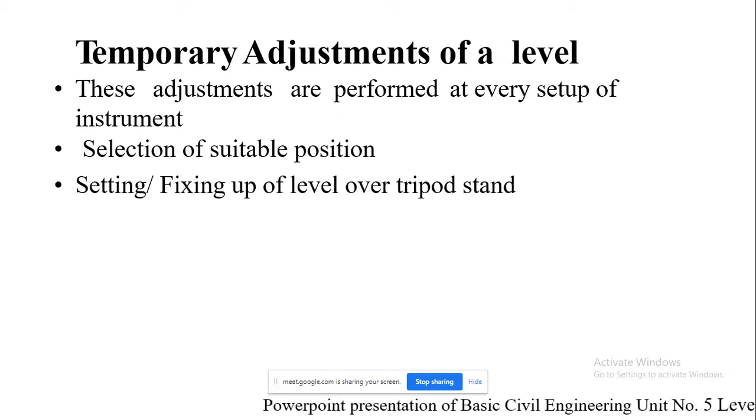First of all, you are supposed to select a suitable position from where the maximum points can be covered, that is, the staff readings can be visible. At such a place you are supposed to keep the level. Second, setting or fixing up of level over the tripod stand with the help of wing nut.

Next one is the approximate leveling by legs of tripod stand. Next one is perfect leveling by foot screws, focusing of the eyepiece, then focusing of the object glass, and taking the staff readings. Okay, so we'll see one by one.

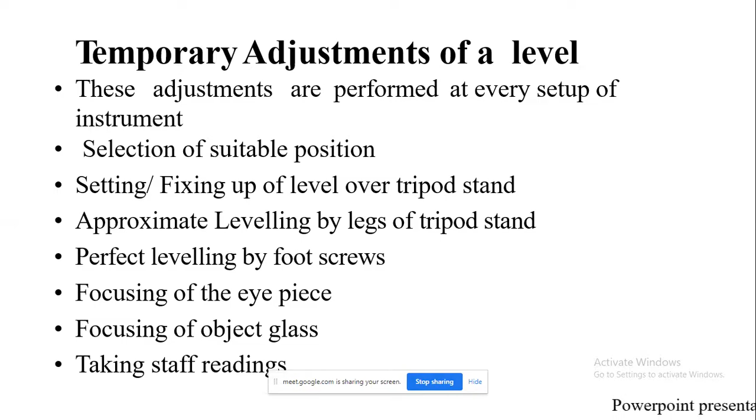So basically, first of all, these are the points. Suppose they are marked here on the ground, of which I am supposed to take the RLs. This I am taking as the reference, a benchmark. Then here is my first point at the corner. Then on the first step of the garden, here is the second point, which is at somewhat higher elevation as compared to that point.

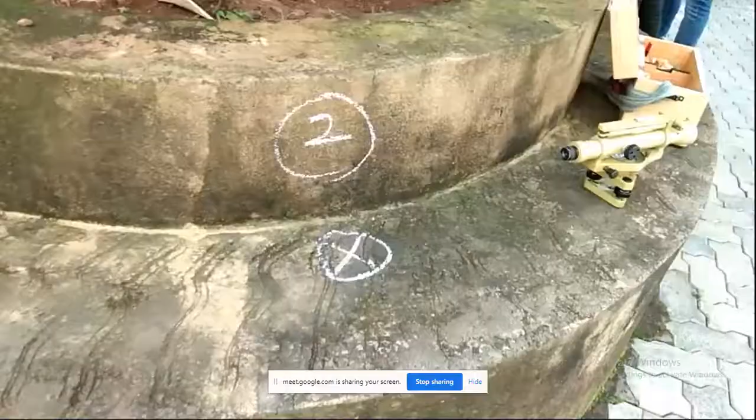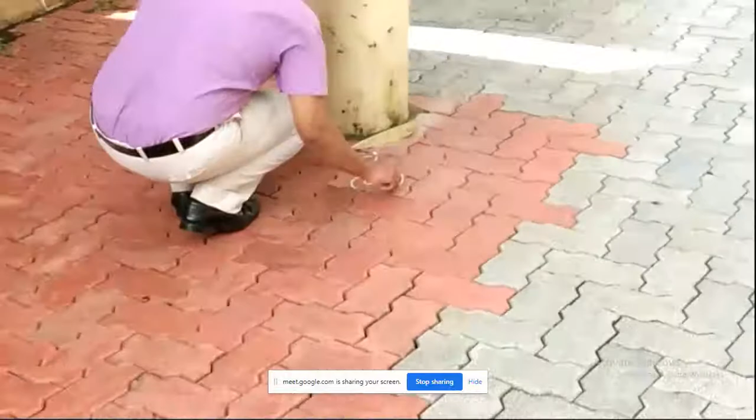Then here is the third point. Then the fourth point is near the strength of materials or testing material laboratory. Fifth point is just beyond the wall. Sixth point is the circular pole. And seventh point is at the first step. So suppose I am interested in knowing the RLs of these points of the ground.

So what is the first step? Correspondingly, I am going to select a suitable position from where all these 7 points are visible. That is selection of position where I am going to keep my instrument.

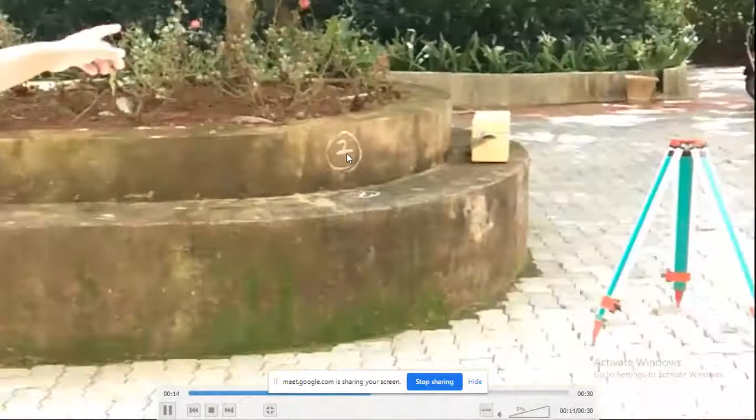So here you can see, there is my first point, that is the benchmark. This is the first point at the corner. Second point I have marked here. Third point is on the right hand side here, corner. Then fourth point is here. Fifth point is on the back side of this column, and sixth and seventh are just behind that. So first of all, I'm going to select the position where I'm going to keep my level instrument.

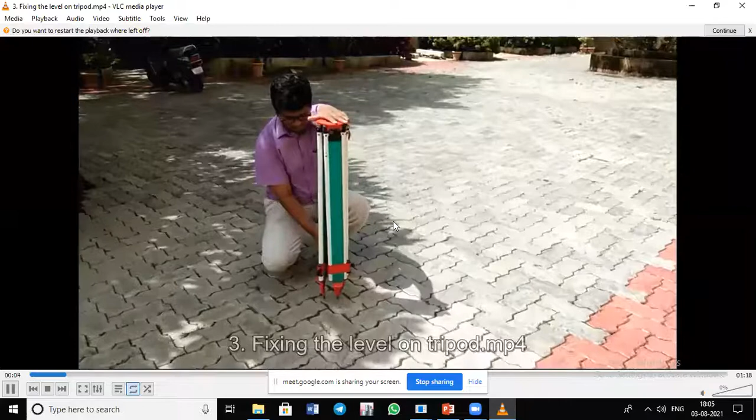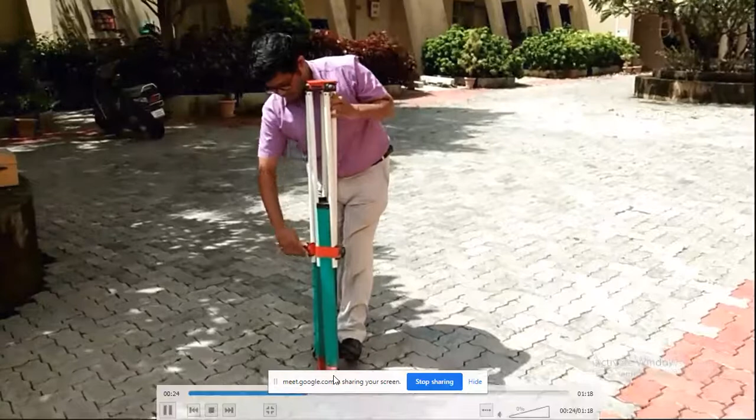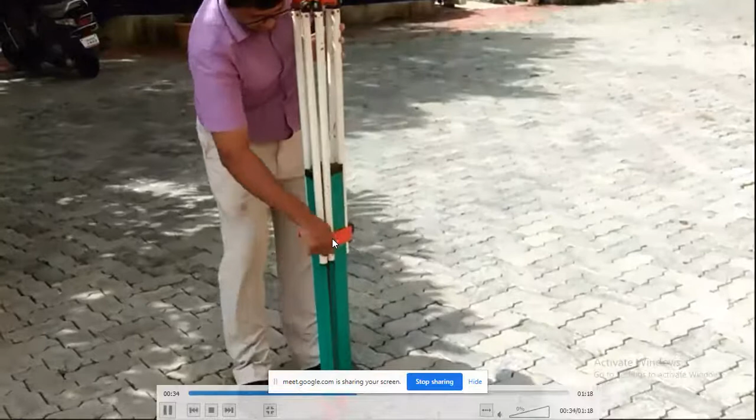Next is setting or fixing up the level over the tripod stand. First of all, I'm going to open the screws, and by keeping the legs at the iron shoes, I'm going to open them equally on all sides. You can see how you are supposed to open it. On a fairly level ground, I'm going to keep all the toes of the tripod stand, and at a suitable height I'm going to adjust it and tighten all the screws, to make it firm.

Then I'm going to spread them well apart. So basically the three legs should be kept in such a manner that they are firm in the ground.

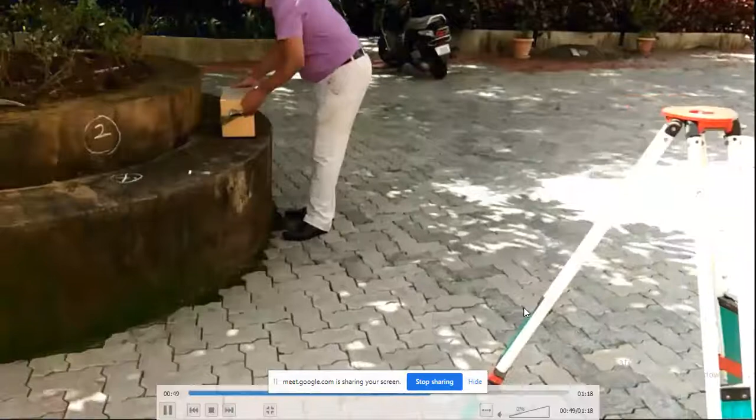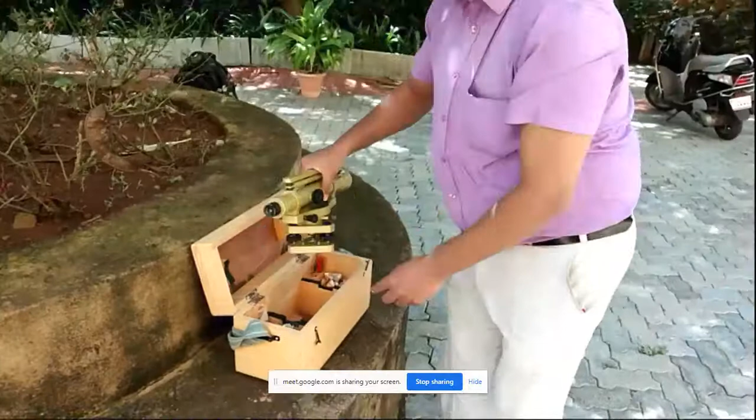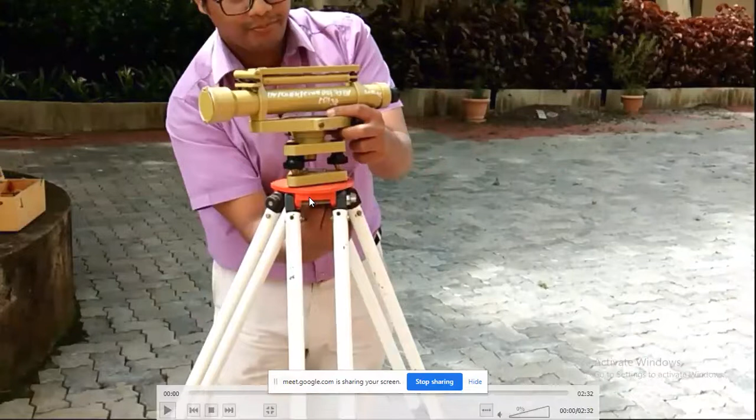So now after selection of the suitable position, I take the instrument, and with the help of the wing nut which is below, I'm going to fix the instrument over the tripod stand and make sure it doesn't move. The wing nut is just below it, so with its help I'm going to tighten it. That is the bottom part, which we call the leveling head.

Trivet. Okay, so after fixing, I have selected the position from which I am going to take the maximum number of points. The next is approximate leveling by legs of tripod stand.

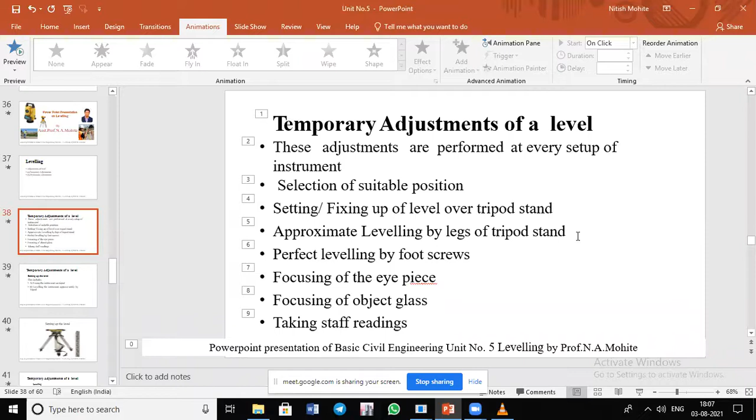Approximate leveling of the tripod stand. So now, here you can see.

After fixing the instrument, these are the components. I'll revise: this is the trivet, these are the foot screws, this is the tribrach. This entire part makes up the leveling head. This is the eyepiece, this is the focusing screw, and this is the object glass.

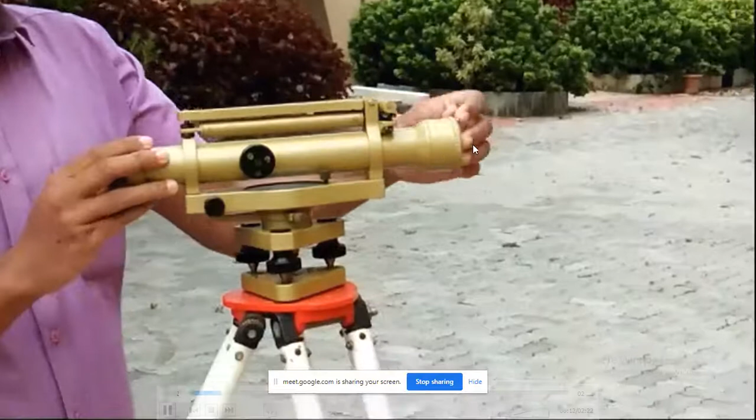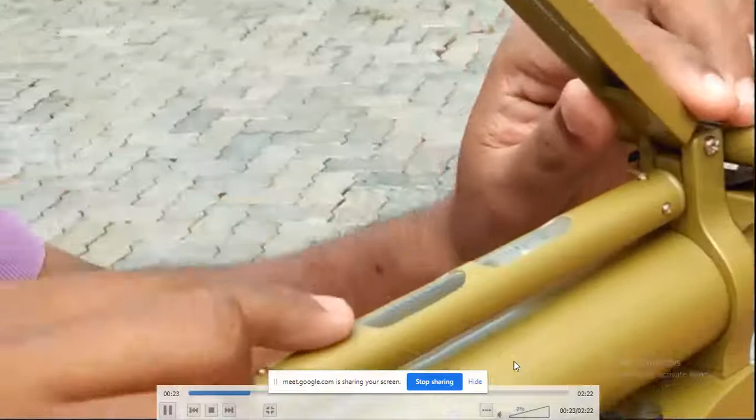This is the longitudinal bubble tube, used for leveling purpose, and this focusing is for clearing the object. This is the bubble tube, which is just above the telescope.

Now, first of all, I will check whether all the foot screws are at the center of its run or not. So when they are at equal height, then what I'm going to do?

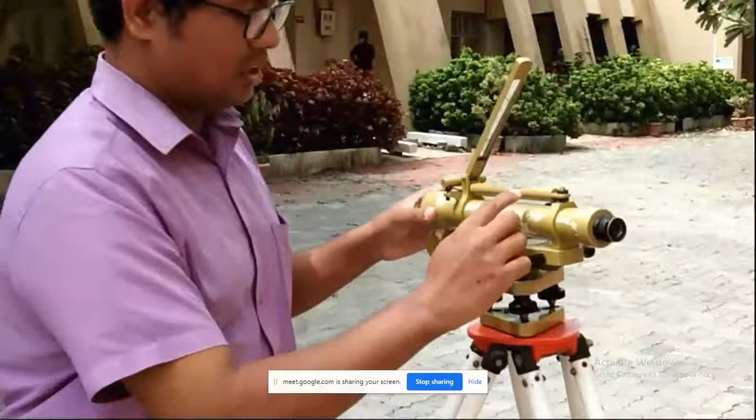Correspondingly, first of all, with the help of the tripod stand, I'm going to bring the bubble by moving the third leg inside outside, keeping the two legs firm on the ground and moving the third leg clockwise or anti-clockwise, inside outside, to bring the bubble at the center of its run approximately.

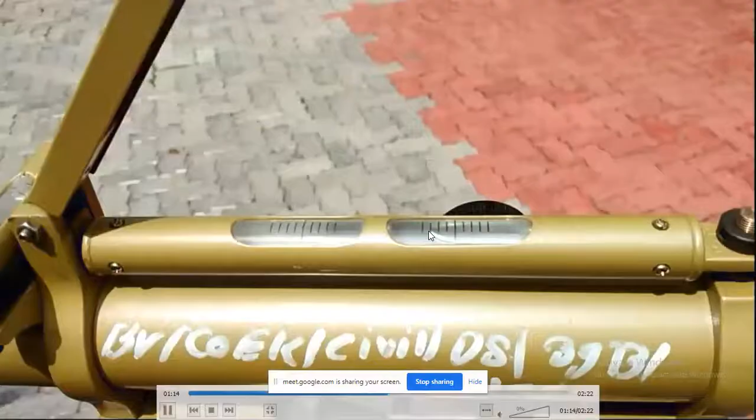So when it comes approximately at the center, you can see there is movement of the bubble as I'm moving the leg. When it comes approximately at the center, I'm going to stop the movement of the tripod leg.

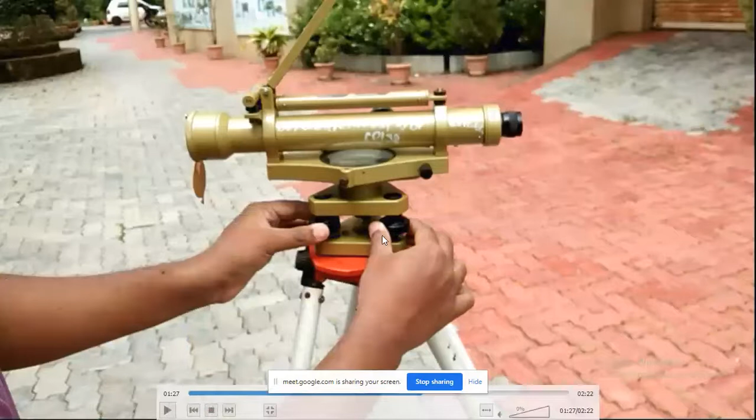After doing the adjustment through the said tripod stand, I am going to do the perfect leveling.

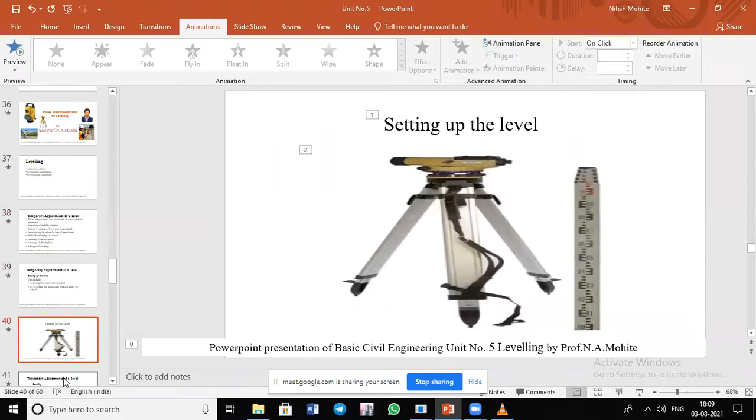Leveling means correspondingly here, as I told you. First of all, I'm going to do the leveling operation with the help of the tripod stand. Leveling is done further with the help of the foot screws.

The purpose of leveling is to make the vertical axis truly vertical. It is done with the help of foot screws.

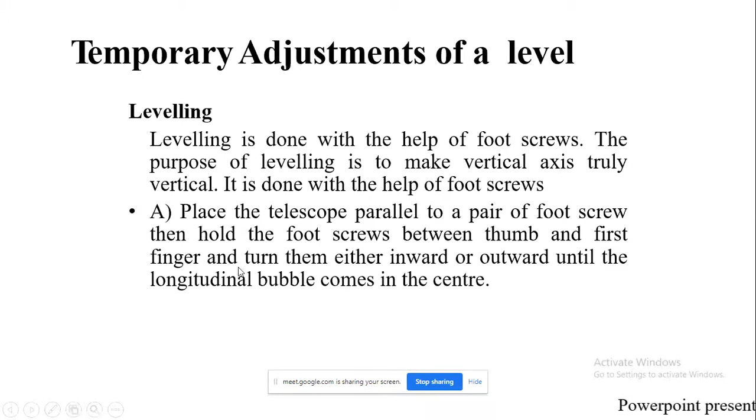First, I'm going to place the telescope parallel to the pair of foot screws. Then hold the foot screws between the thumb and first finger and turn them either inward or outward, clockwise or anti-clockwise, until the longitudinal bubble comes to the center.

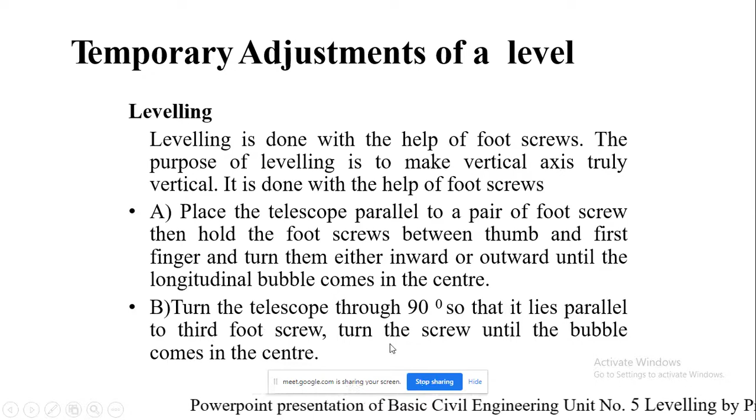Then by turning the telescope through 90 degrees so that it lies parallel to the third foot screw, turn the screw until the bubble comes to the center.

First of all, I will show you the sketch. Here is the longitudinal bubble tube. Likewise, it is going to move.

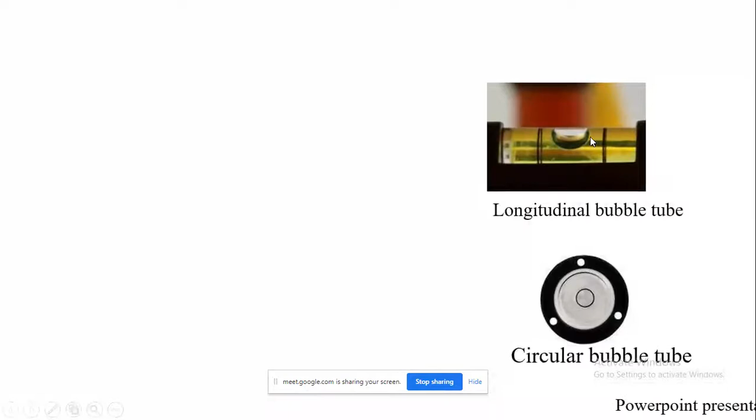This is dealing with the case when you are going to deal with the dumpy level or the theodolite. The circular bubble tube is present in case of auto level or total station.

Move these two foot screws, A and B, simultaneously in clockwise or anti-clockwise direction, and bring the bubble to the center perfectly.

Now what I'm going to do, correspondingly, I'm going to turn it 90 degrees so it will just make it perpendicular. Like this it will be my...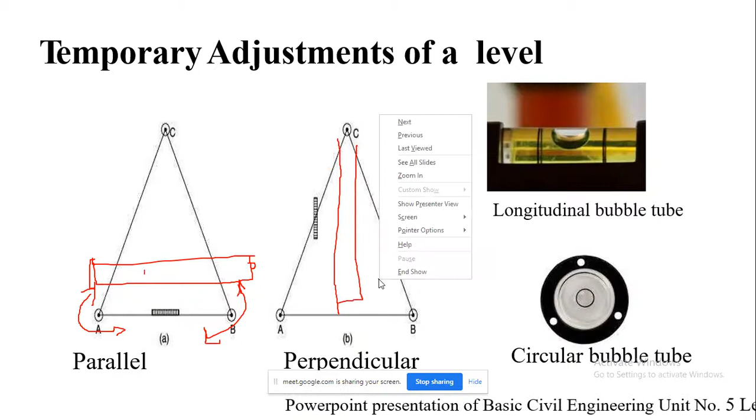Just a minute. Yes, okay, so I'm going to turn it. Like this, here will be my eyepiece, this will be my object glass.

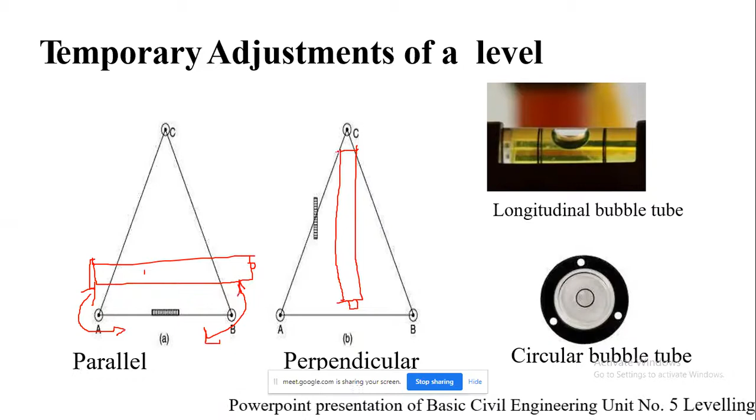Further, make use of the remaining third foot screw and rotate in clockwise or anti-clockwise direction until the bubble comes at the center of its run. Exactly. So how is that? I will show you it.

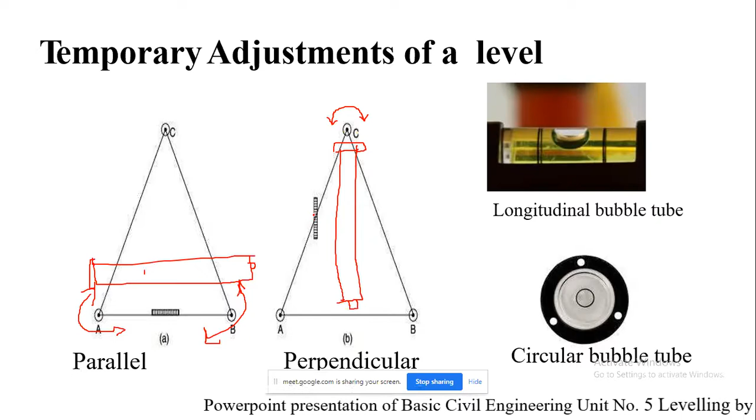Here you can see, I keep the bubble tube correspondingly parallel to the two foot screws and move the two foot screws simultaneously in clockwise or anti-clockwise direction.

So after, as I told you, the tripod's adjustment, here you can see.

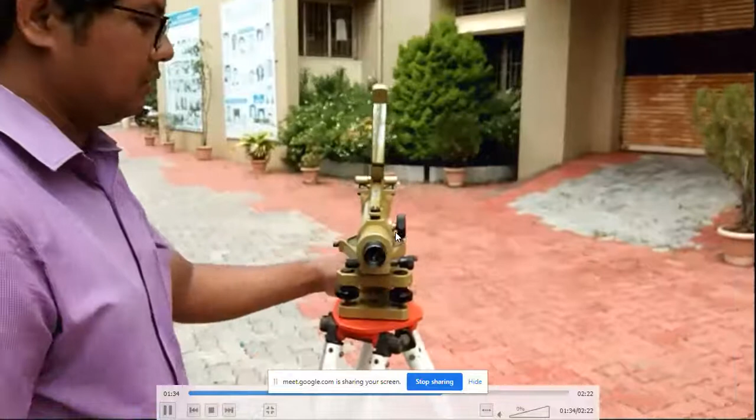By keeping the telescope plate bubble, that is the longitudinal bubble, parallel to the foot screws, I am going to move two foot screws inside and outside, that is clockwise and anti-clockwise, to bring the bubble at the center. Then make it perpendicular to the first two foot screws and rotate the remaining third foot screw to bring the bubble at the center of its run.

You are going to carry out this procedure until the bubble comes exactly at the center of its run. After this, give a jerk and check at any position other than the parallel and perpendicular positions that the bubble remains at the center.

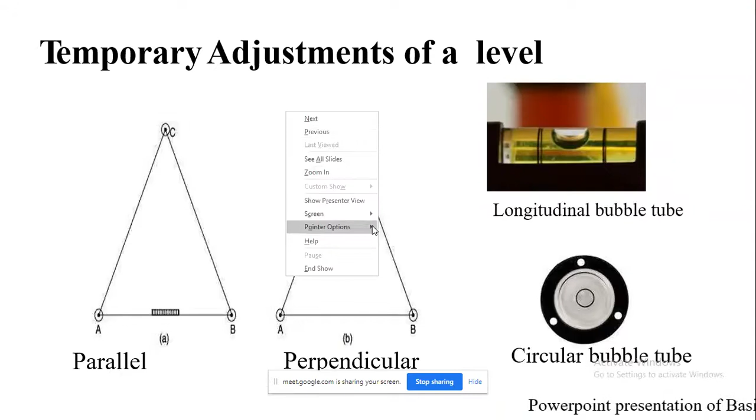So it should not be the case that whenever the telescope is other than in the parallel and perpendicular position, the bubble moves away from center. The telescope might be in this direction or in this direction also, but in each of these cases, the bubble should remain at the center.

So first keep parallel to the two foot screws, then rotate the first two foot screws and bring the bubble exactly at the center of its run. Then keep the bubble tube perpendicular to the two foot screws, rotate the remaining third foot screw, and bring the bubble at the center of its run. In this case, listen carefully.

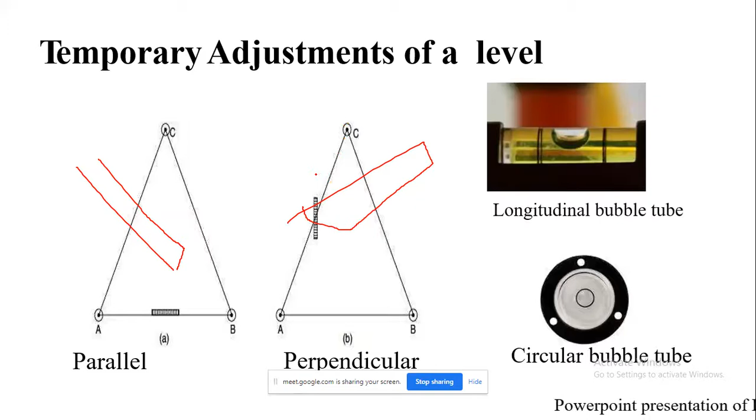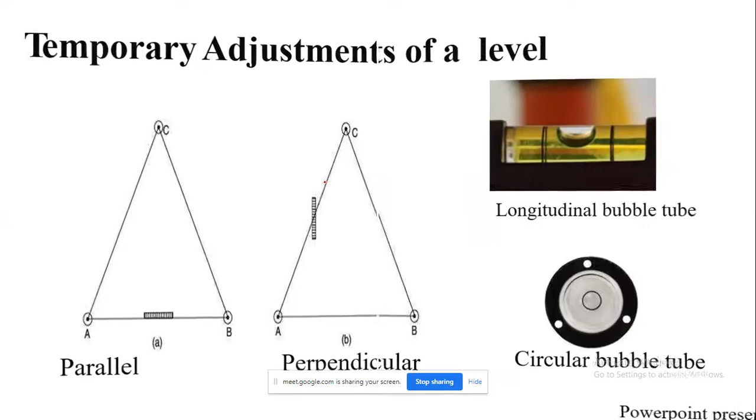Next, what you are going to do is focus the eyepiece. To focus the eyepiece, I am going to hold a white paper, or a page of a notebook, in front of the object glass and move the eyepiece in or out, that is clockwise or anti-clockwise, until the crosshairs are distinctly seen.

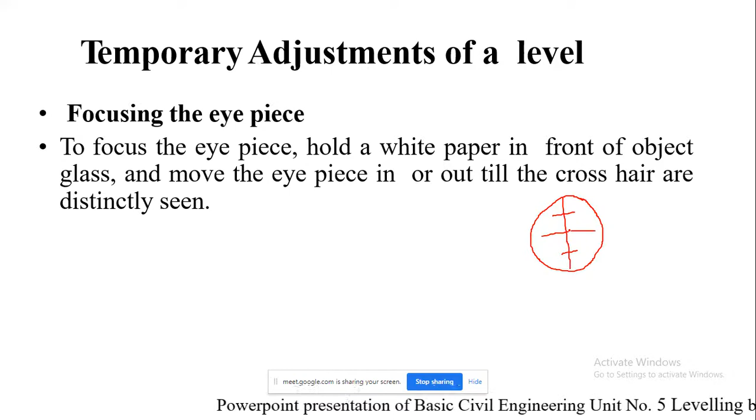So the crosshairs are like this, which are available. This is the entire object glass on which, after bisecting the leveling staff, you are going to see this. So for adjusting this, to clear out the eyepiece in order to see the crosshairs, you are going to rotate it.

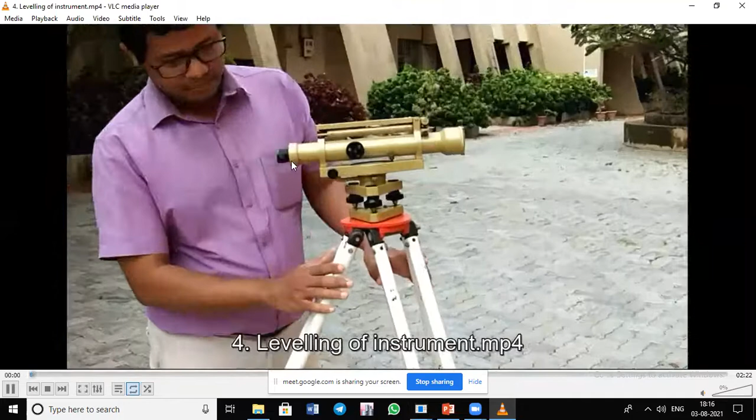Just a minute, I'll show you. So what you are going to do is rotate this eyepiece in clockwise or anti-clockwise direction, so that whatever the crosshairs are, they become clear.

After focusing the eyepiece, you are going to focus the object glass. In this case, you direct the telescope to the leveling staff, and on looking through the telescope, turn the focusing screw till the image appears clear and sharp.

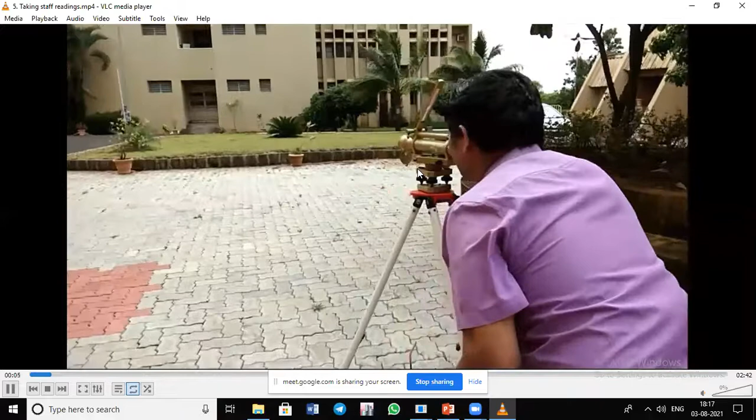Now, after doing all the temporary adjustments, that is leveling, you are going to focus it over the staff. This is my first point, of which I have taken the benchmark as a reference. You can see the person standing perfectly vertical, and with the help of the focusing screw, I am going to focus it and take the staff reading.

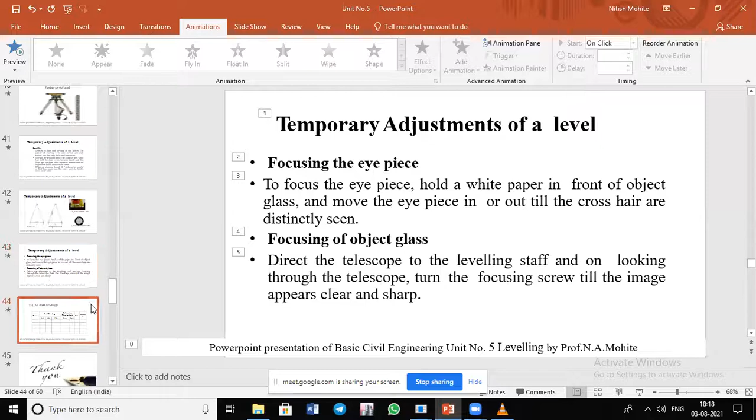Whatever the staff reading is, I am going to note it down and enter it in the observation table. This is the observation table, which we call the RL recording sheet. The bench station is here first. Whatever reading we have discussed, the first reading is taken on the benchmark. Whatever the reading is, I am going to enter it here, and the remark will be temporary benchmark, TBM.

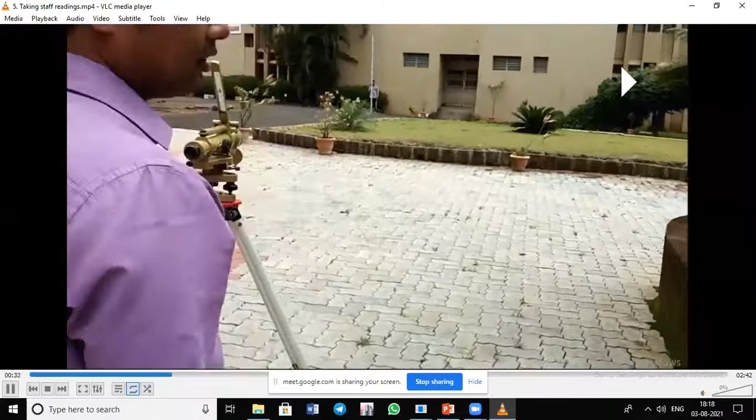The first reading is always taken as the back sight reading. Then this person will move from the benchmark to the next point. You can see here he is writing the reading.

Then he will come to the first point. This is my first point, of which I have taken the reading. Again, I am going to focus it, with the help of the focusing screw, direct the telescope towards the leveling staff, focus it, and take down the staff reading, then enter it.

Again focus the second point, this is the second point, of which I am going to take the reading. Then note it down in the observation table. Then this is the third point.

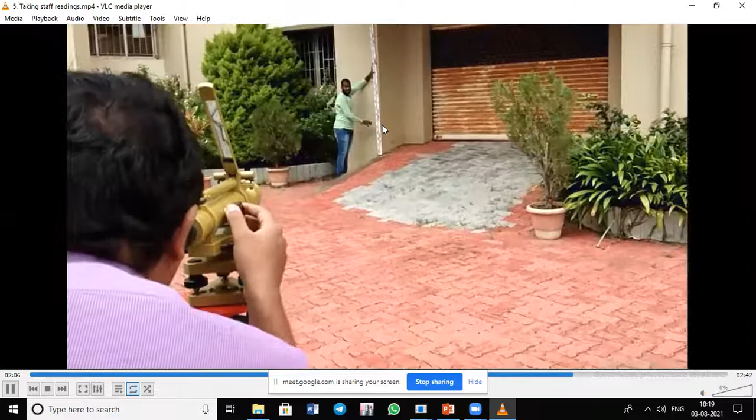Okay, so here we have taken the third point. Again, direct the telescope towards the leveling staff, focus it, take down the reading, and note it down in the observation table.

So this is the fourth point which I have taken. But correspondingly, the fifth point, we have known that the point was marked just beyond it. Show it here.

So first point, I have taken the benchmark staff reading here. Then correspondingly second staff reading I have taken here. Then third here, fourth there. But the fifth point is just beyond this, from where the instrument has been set up. So from that point, which is just beyond this wall, it is not visible to me.

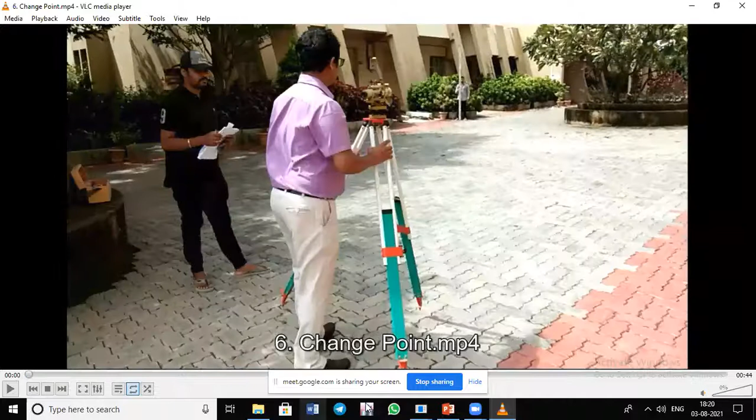So in that case, what I'm going to do is take the change point. Before shifting my instrument, whatever readings I have taken of the benchmark, I am going to write at the back sight. So whatever is the reading of the first station point, I enter it in the IS, then second point in the IS, third point in the IS, because they lie between backsight and foresight. Now the reading of the fourth point I am going to enter in the FS, because the fifth point is not visible to me. So correspondingly I have entered it in the foresight reading.

That is the closing point from that particular position from which these points were visible: temporary benchmark, first, second, third, and fourth. Now I am going to shift the instrument, but the staff position is going to remain the same, at the fourth point. So now shift the instrument and keep it at such a position from where the fourth, fifth, sixth, and last point, the seventh, are all visible. I am checking whether all points are visible or not.

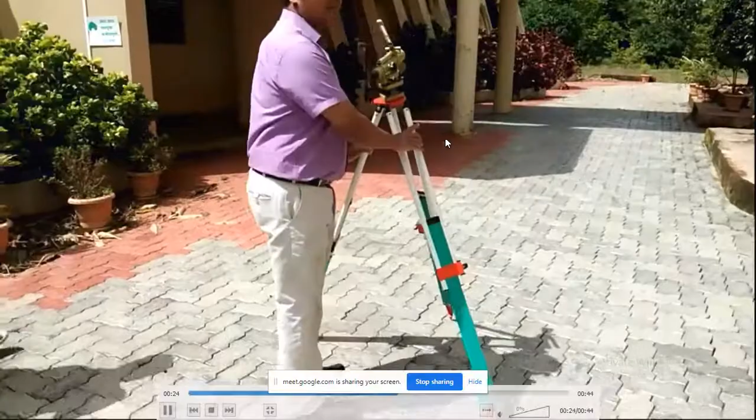So there is my fourth point. Now this is the fifth point, here is the sixth point, and here is my seventh point. So this position I am going to select, that is the suitable position from which again I can take the staff reading. So this concept is known as the change point.

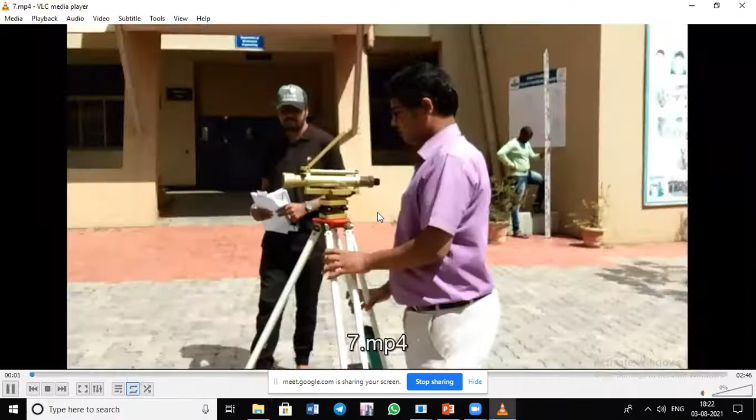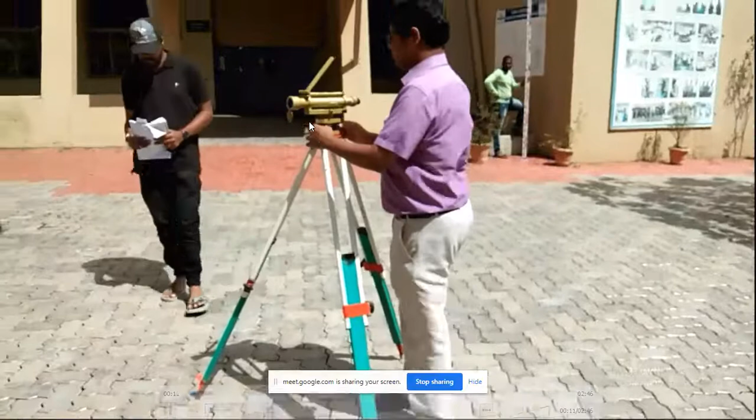After taking the change point, I am going to do all the leveling operation again with the help of the tripod leg. I'm going to do the adjustment, bring the bubble to the center of its run, then make the telescope or bubble tube parallel to the two foot screws, then make it perpendicular and bring the bubble to the center of its run again.

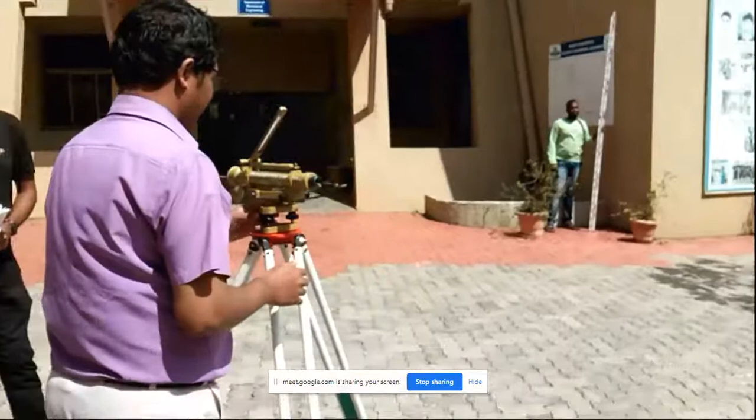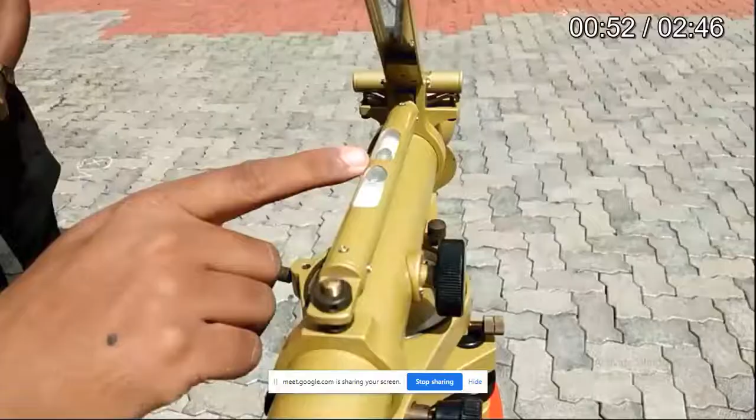After doing the leveling operation, now you can see the bubble is at the center. So now again I'm going to bisect towards the fourth point and take down the staff reading. This is my new position from which I am going to start my leveling work. Again directing the telescope towards the leveling staff, I take the staff reading and note it down. Now, in the case of the change point of the same station, I am going to enter that reading in the backsight.

So before shifting the instrument, I entered the reading in the foresight, and after shifting the instrument, I take the backsight reading and enter it in the backsight of the same station point. Then further the readings of the fifth point I take and enter in the observation table, that is in the IS. Next the sixth point.

And that of the last point, the seventh point. So these were correspondingly the readings which were taken. This is the field procedure, and correspondingly the readings that were taken are entered in the observation table.

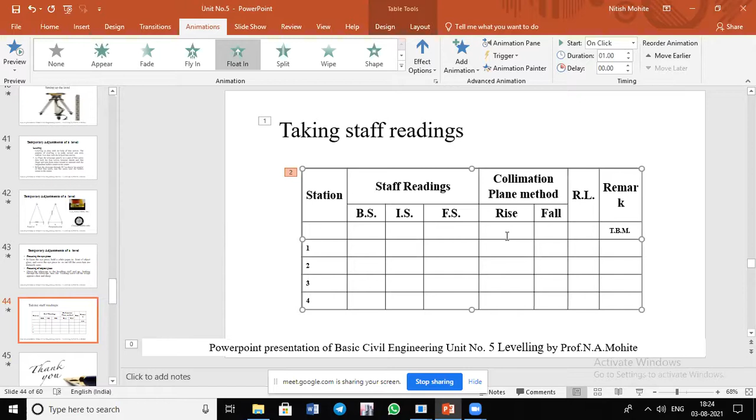So the next part is the calculation, which we are going to discuss in a further session.